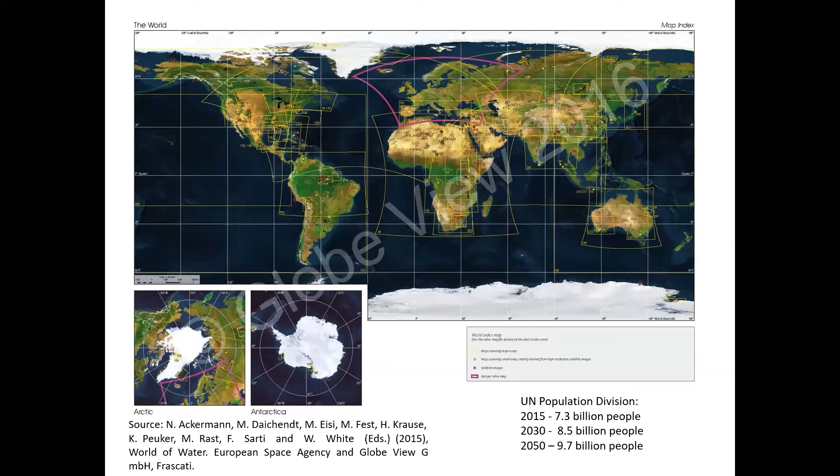I would like to start by all of us seeing the world. It is said that the green in the world depends on the blue. This is, wherever we have precipitation, we will have more vegetation. When we don't have precipitation, the situation is different because the countries and cities that are arid or semi-arid face different types of challenges. So if we see here in our map, the one we all know, we see those parts of the world that have less precipitation. And together with this, with the less precipitation, we know that population continues increasing. So we have the double challenge of providing clean water supply and sanitation services to an increasing number of population with less water resources.

Also in terms of our water resources, many of our cities suffer from water stress, but this is not necessarily because of precipitation, although the impacts of lack or more or less precipitation are important. But this water stress depends on the ratio of total water withdrawal to available renewable water supplies. And this is entirely a human activity. So we need to withdraw more water for our different economic and social activities. In places that are naturally arid or semi-arid, this withdrawal makes water management more difficult. But even then, we are not using the wastewater that represents a very important potential source of water.

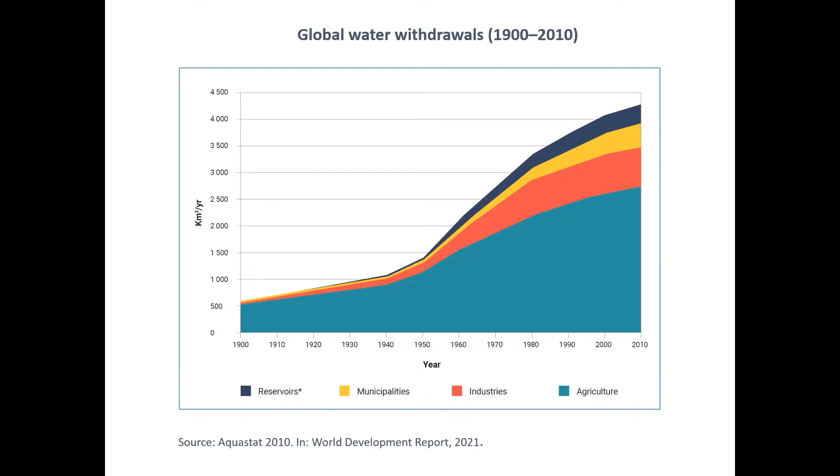Where is it that we have these withdrawals? In which sector? We know that most of the withdrawals are for agriculture, followed by industry, and then the domestic sector. And of course, the amounts we have in reservoirs. And it is said of agriculture that it is a water inefficient sector. However, when we irrigate less, also less water percolates to groundwater. We are a system, and water, clean water and clean wastewater are part of the system in order to provide all these services, the municipal, the industrial, and those in the agricultural sector.

As a result of all the withdrawals, we have that the groundwater table has declined, and this has been known for a long time. It is basically for economic activities. We don't stop withdrawing because groundwater is needed, but we also don't use the water more efficiently. The question is, could we use treated, well-managed wastewater to recharge groundwater tables? And this has been proven numerous times. So it is possible. This is my point in repeating coming every time to wastewater, to clean wastewater, is just to emphasize the importance that the resource has for areas that are depleted, for growing population, and for increasing economic activities.

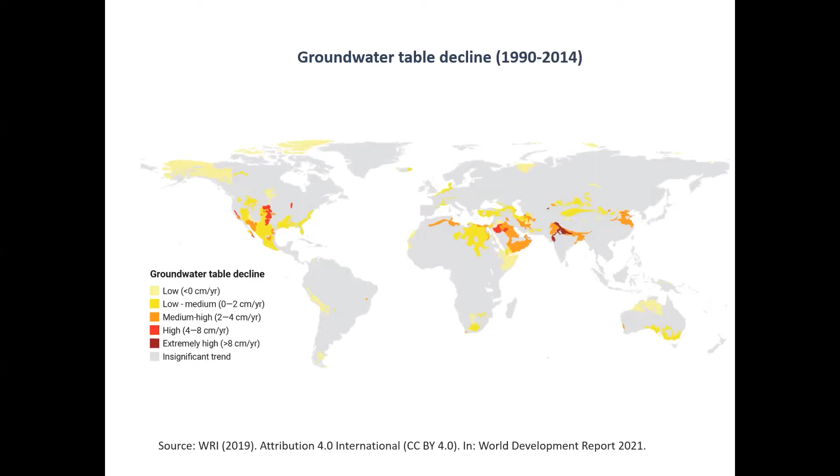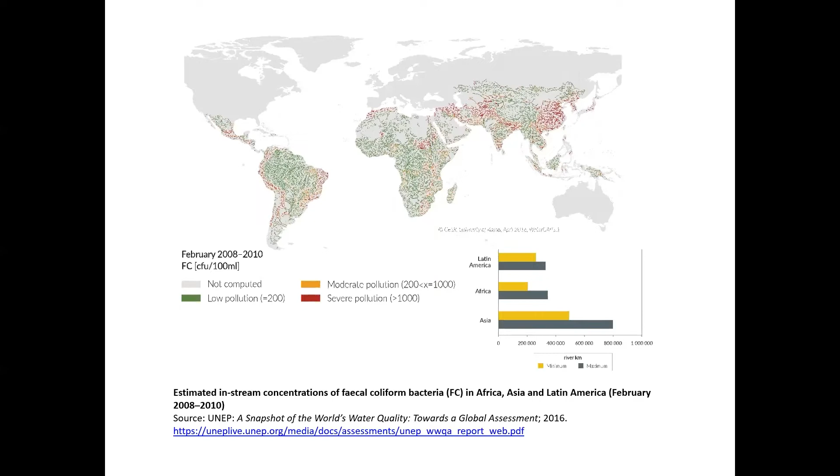Water resources, we know, are scarce and are polluted. In this slide, which is from the United Nations, and it is only for Africa, Asia, and Latin America, we see that our bodies of water are polluted, which we have known for a long time. In the case of developed countries, pollution is mainly because of agriculture, because developed countries have established systems to treat and manage water discharges from industrial sources and domestic discharges. But they have problems in terms of agricultural discharges, and we in the developing world, we have problems because of poor treatment of wastewater, of all economic activities.

They face the same problems, except they have better governance. So we see these graphics until 2017.

By now, 2022, the United Nations says we still have to reach billions of people in terms of clean water, not only water, but clean water. Sanitation is not as good, because many more services need to be provided to larger sectors of the population. So we are running behind in terms of water supply and sanitation.

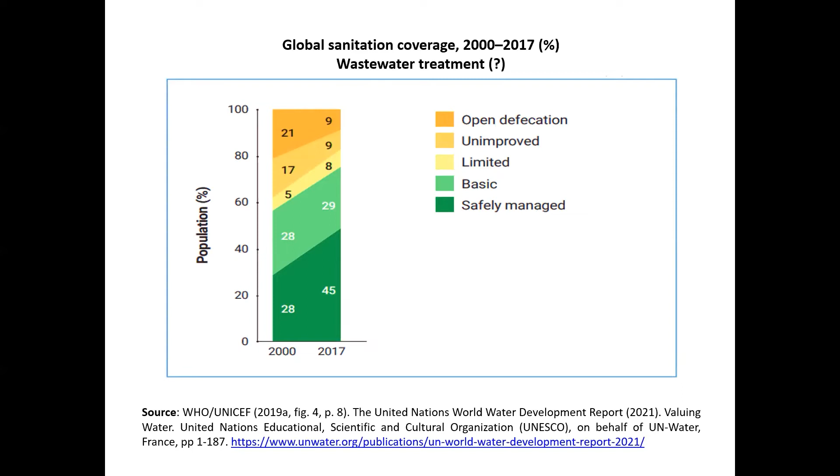Treatment of wastewater has been forgotten for many decades, until the SDGs came. When the Millennium Development Goals came, covering the period from 2000 to 2015, one of the goals was to ensure environmental sustainability, with the objective of providing clean water and sanitation to a certain percentage of the population. Was this achieved?

The United Nations explained the mistake, and it was rectified. The mistake was that improved sources of water were considered, but improved doesn't mean safe water. Improved only means that you compare it with the previous source you had, which mostly depended on infrastructure, which of course is very important. But the fact that we have infrastructure doesn't mean that water is safe to drink.

So what the MDGs were measuring was access to improved drinking sources of water. But again, water quality was not considered.

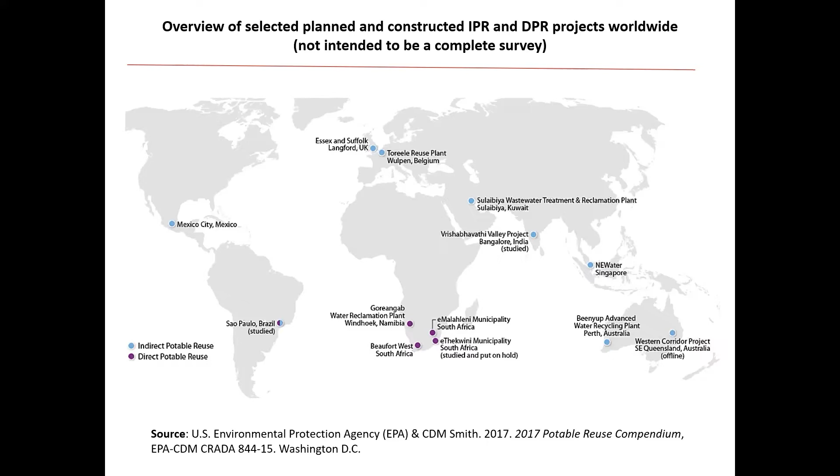And then we have the Western Corridor project in Queensland, which was basically cancelled because people and politicians in the end decided not to work in it. Project capacity goes from, in Belgium, in Wulpen, 1.9 million gallons per day, to now Orange County has 130 million gallons per day, Singapore 122, but it will have more as NEWater plants start operating. This means more water available, more clean water available for more uses.

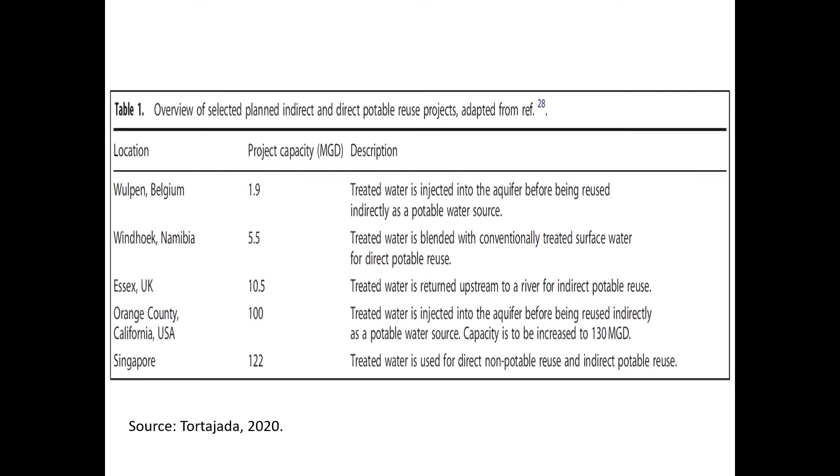This means that wastewater is being managed and treated. So our new source of water is the one that has always existed, which is wastewater.

These are the number of cities. This is from 2017, so you can imagine that by now, 2022, there are more cities already going into either indirect potable reuse or direct potable reuse. But the United States is a place where it's a trend. Water reuse has become a trend.

And what is more important is that, as in the other cases where there are water reuse projects, where wastewater is managed and treated and has an objective, a purpose, this wastewater is not only produced, but it is made part of a water demand management program.

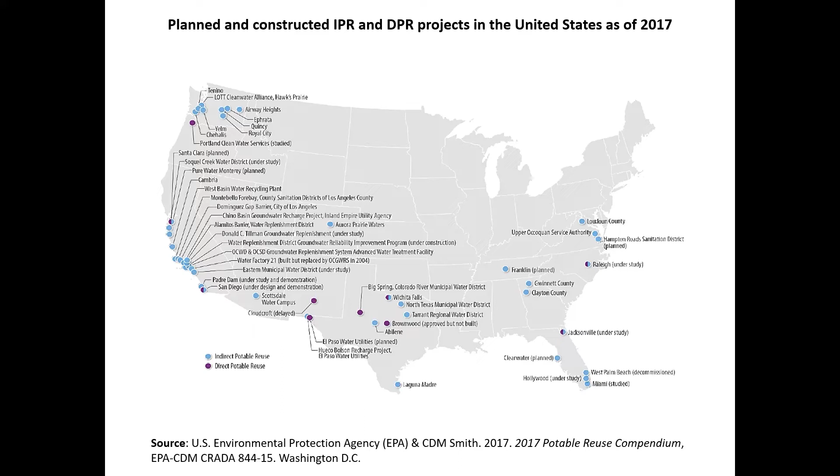So in the case of Singapore, there is more water produced through desalination and treating, managing, recycling wastewater. But this becomes part also of water demand management, not only because there is more clean water, this time from wastewater, but because water conservation plays a very important part in each city where you see recycled wastewater projects.

An example of a city where this potential has been lost for many years is the Mexico City metropolitan area, that has grown in terms of population and now has become the Valley of Mexico metropolitan area.

Our mega cities, we don't count the people. At some point we say, well, they have more than 10 million people, later on more than 20 million people. And we don't know because there is just immigration, all the time there is immigration.

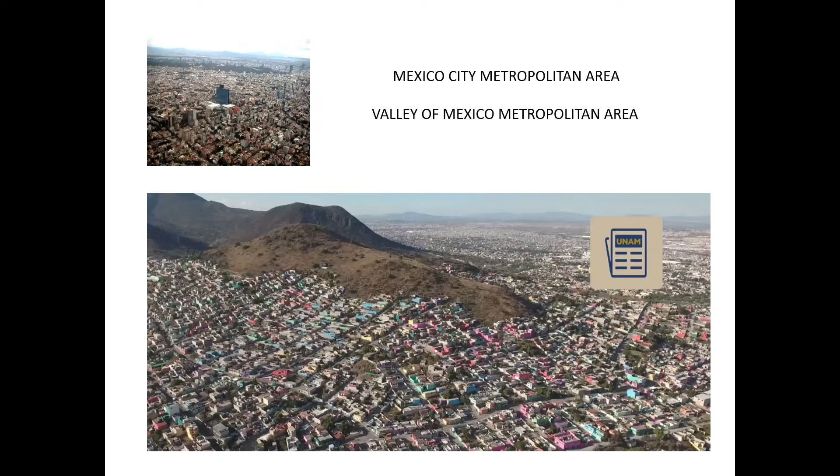So this city is not unique, it looks like many other cities in the world. Population has grown too much, resources are not enough, governance is not the best. What is the situation in terms of water?

This is a city, well, a valley now, that has traditionally obtained water from groundwater, except it has always been abstracted at a higher rate than the natural recharge. For many years, for decades, there has been overexploitation, as a result of which several parts of the city are subsiding.

And the city has always, because it has grown so fast, always required water transfers. What are the impacts of water transfers? The populations who live in those places that are normally rural areas, and the socioeconomic activities you could have in those areas, they have to be stopped. This is what happens in many cities, mega cities of the world. Resources, be this water, food, energy, they are brought to the largest center of population.

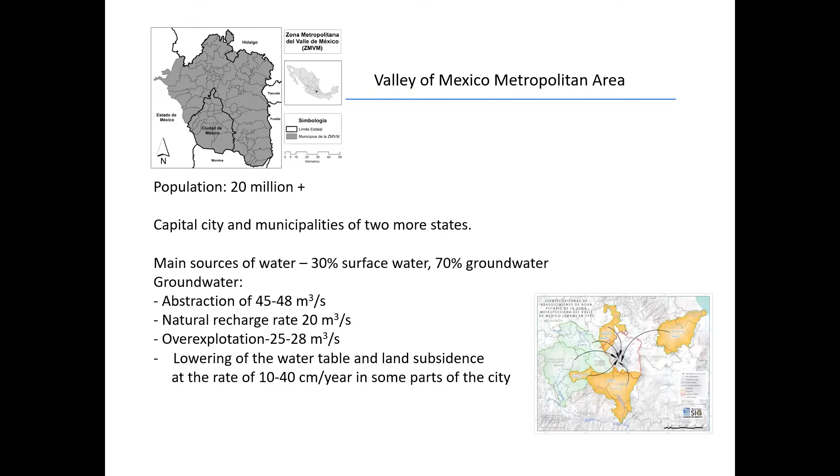So you are producing water, transferring water, and bringing it to a city that is highly inefficient. From where, already some years ago, 45 cubic meters per second of wastewater are produced and are not treated. A very large treatment plant has existed for years, and it is not used to its full potential. So this wastewater that could be used and represent another source of water is not being produced yet. This wastewater that could be part of a water conservation project, that could be part of the system of the city, is not being used.

What are the implications for the population? People who are better off, who live in better socioeconomic areas, have access to better services. This doesn't happen only in this city, this happens in every other city. The people who are wealthier can live in places with better services. People who are poor live in whatever place is available, and they don't always have services.

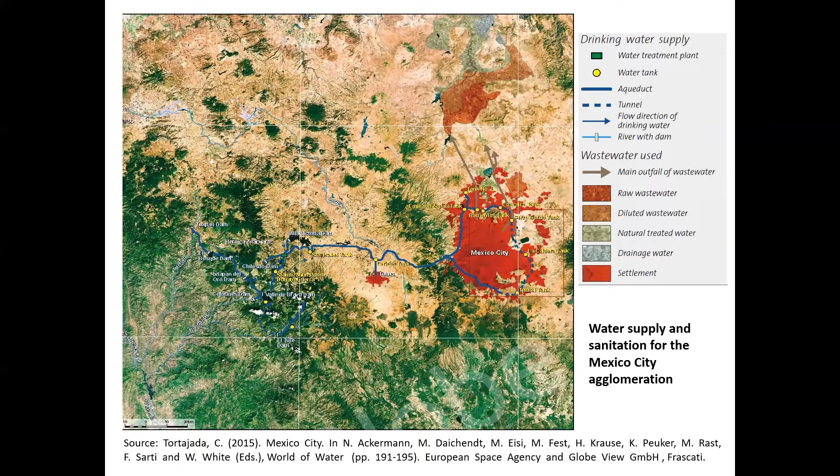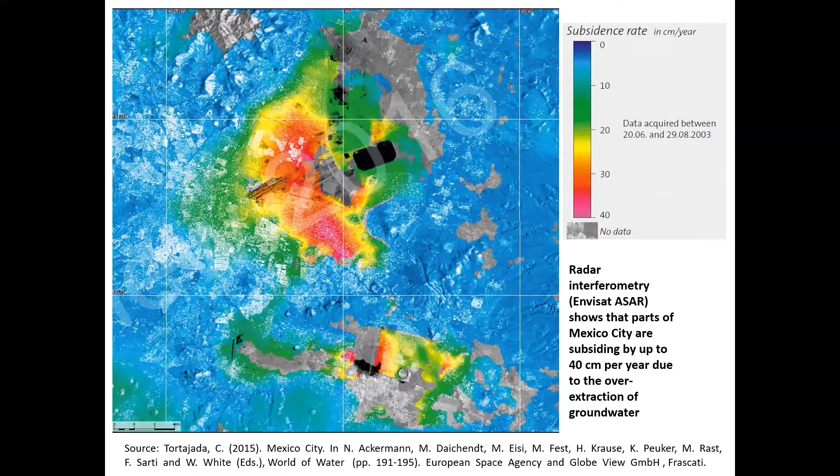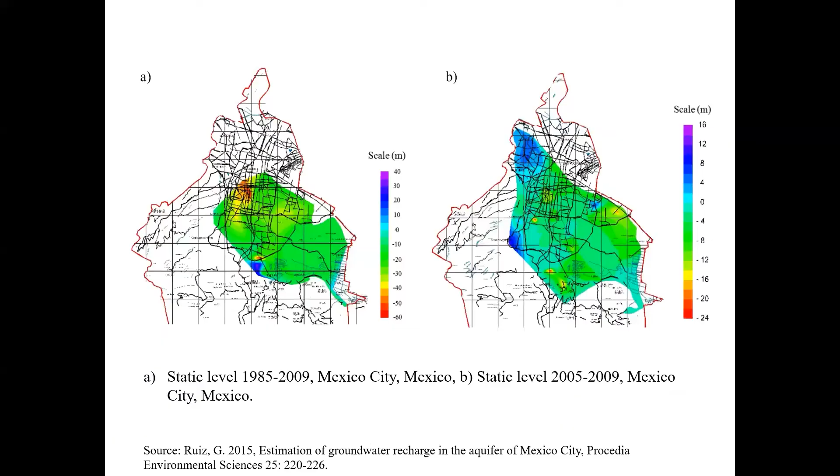We have a problem and we respond to it, and many times with our responses, we create another problem. So what has happened, as I mentioned, in terms of subsidence, many places of the city have subsided by several meters. And we can see in these parts of the city how much we can see the static level.

And this is a diagram I like very much. All the red circles that you can see are surrounding what used to be rivers. It used to be a city of rivers. All of these previously cities of rivers were not treating wastewater, but this means that we already have a way to collect the wastewater. This means that should we as a city decide to treat the water, it is already being collected.

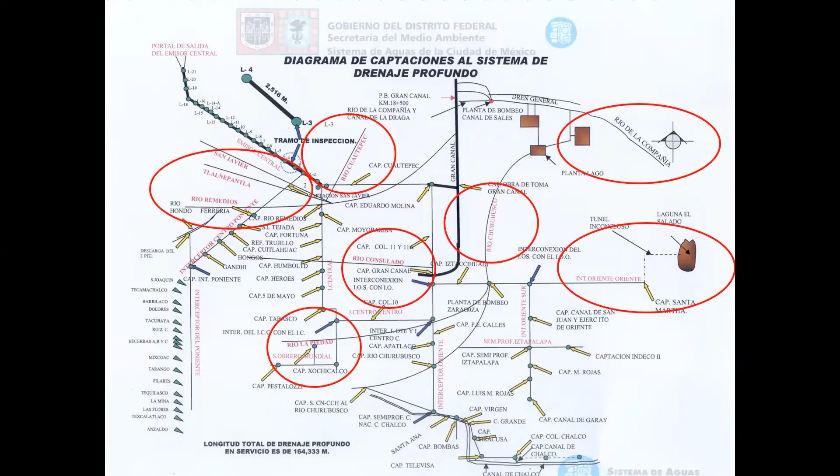We know that Singapore has been working very hard on the deep tunnel phase 1 and phase 2, whose purpose is to collect the wastewater. Well, here in the city, the previous rivers are collected through drains. So they could be - you already have a system that would have to be improved, but there is already a system. Now, the next step would be the treatment and the better use.

Where does the wastewater go? Mexico and India, several parts of the countries, have been known traditionally for years for using raw wastewater for irrigation. And it's a sense of pride that is not properly understood. We shouldn't be using it, because with this, we create problems in the environment and related to human health. However, these are the sources of water that are available. And this is a very political issue, because the farmers want the water because it's free, with heavy metals and all the contaminants we have.

But a solution is possible. Now very quickly, I will show two examples, one of potable reuse, which is Windhoek. This is a developing country. From 1968, Windhoek, which is in a desert area that suffers extended periods of drought and depends on groundwater, and where surface dams depend on ephemeral rivers, depends on treated, recycled wastewater for domestic uses in the capital city, which is Windhoek.

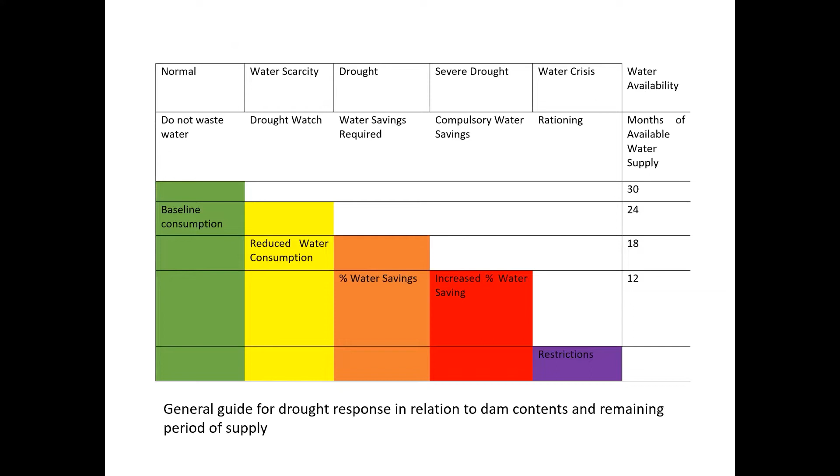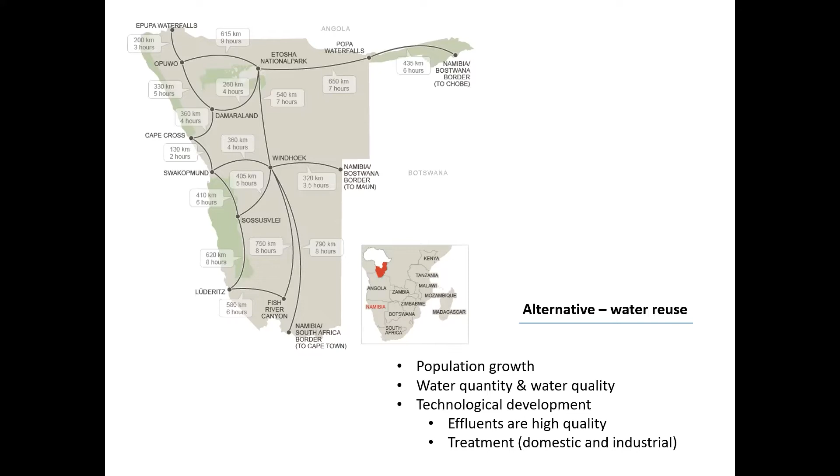The alternative, as I have mentioned, is water reuse. It's never about water, it's never about the technology alone, it's about the planning. It's about considering your water quantity, your water quality, the uses of your water, and how you manage the demand. And then finally I come to Singapore, where we know there have been innovations in terms of policy, management, and also technology.

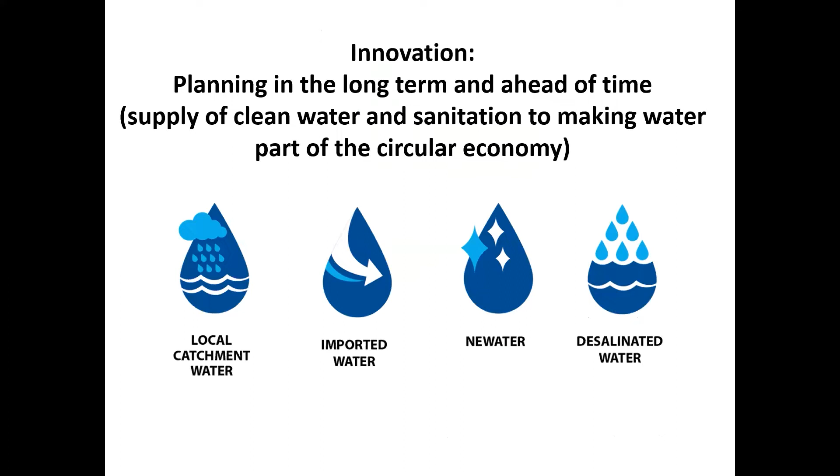We know of the four water taps, but I will focus only on the third one, which is NEWater, or recycled wastewater. What we have is several numbers, but what we really have is a plan. It's not about the number of NEWater plants, it's a plan: I want to grow, and one of the resources that are reliable and that I have is wastewater.

So I manage it properly, I treat it properly, and then I use it mainly for industrial purposes, but also for domestic purposes if necessary. Our wastewater becomes one more source of water within a plan. If we don't use it within a plan of water conservation, water demand management, development and growth, then it will also be wasted, as water is normally wasted by all sectors.

Challenges we know all over the world include public perception, in addition to costs. Not only the Public Utilities Board, National Water Agency of Singapore, but every other city that is treating and managing wastewater and using it, needs to approach and deliver a message to the media, members of parliament, religious leaders. You provide public education campaigns, show the value of it, which is what Singapore has done, and you always keep a positive tone, because having more resources which are clean is always positive.

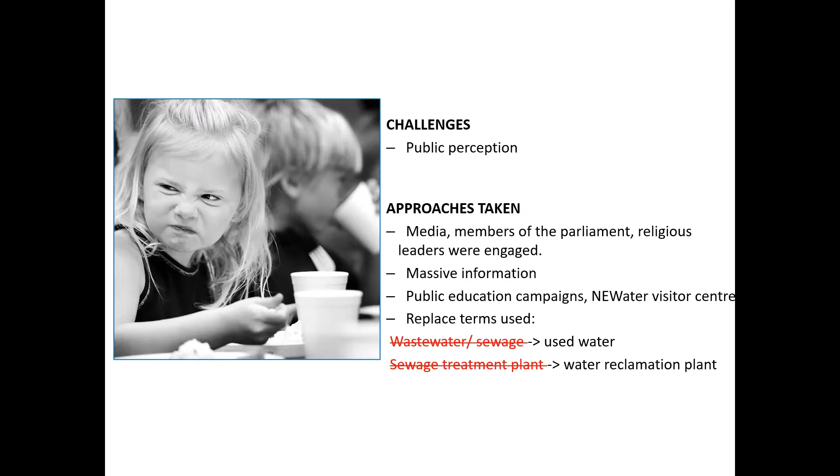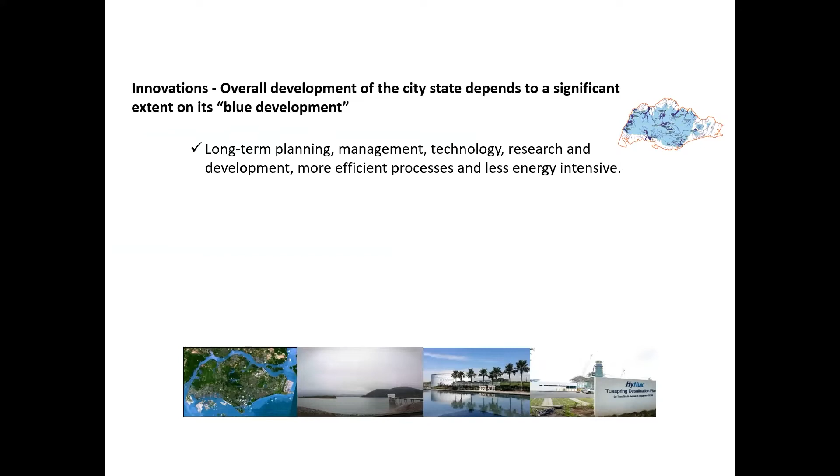When we talk about innovations, we tend to focus on technology, but they are not the most important. The policy innovations are the most important ones. We need long-term planning, management, technology, and research and development. Because if we don't do it within these overall plans, and if we focus only on one resource, it will not result in all the benefits it can if we do it within a broader plan of development.

We are diversifying water supply sources, but we should also work more in terms of protection and reliability. We have wastewater, and we will continue having wastewater. It is a reliable source - not only in Singapore, as with new water, but in every city of the world we have new water. We have wastewater that can be treated and used at different levels.

Finally, we're looking for systems that are more robust during events such as droughts, and this is something climate change has been teaching us. There are problems, we have to address them from now, and we should try to buy time. But wastewater provides services. Wastewater, again, just summarizing, sustains water resources. It helps us to deliver services, and it helps us to build resilience.

Clean water is not, and will never be, possible to provide for all users if wastewater is not collected, treated, and disposed of properly for the intended uses. It is a cycle, and we have to learn to consider wastewater as part of our clean water sources for our SDGs at the macro level, and to cover every other need at the micro level.

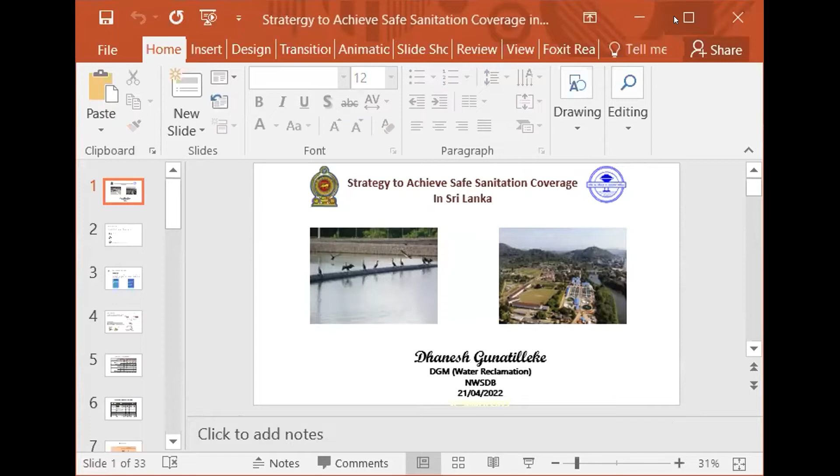Hello, Engineer Dhanesh? Yes, yes. Okay, we cannot hear you. Can you hear me now? Now, yes, now it is okay. Yes, okay, please go ahead. Yeah, okay, I'll continue.

So I'll be discussing strategies to achieve safe sanitation coverage in Sri Lanka. I'll be orienting my presentation in basically three areas: the recent development of the sanitation master plan by the National Water Supply and Drainage Board Sri Lanka, where we are right now, and the technological approach to meet sanitation targets. So that was my presentation outline.

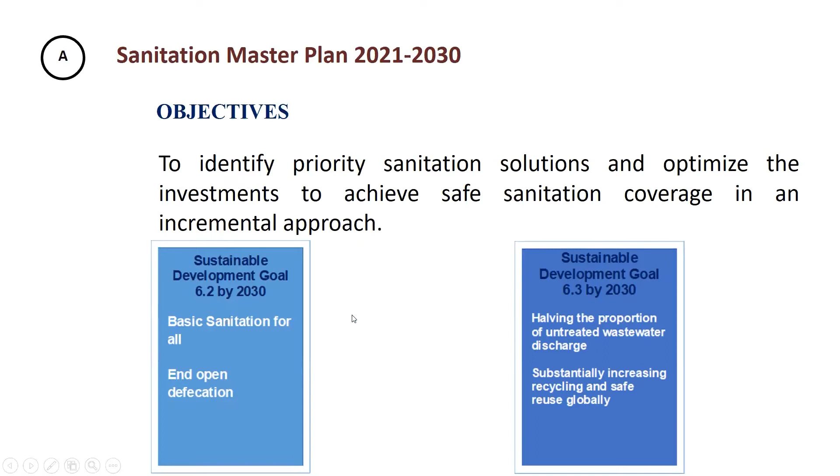As you all know, the Sustainable Development Goals 6.2 and 6.3 require certain commitments by 2030. So we developed our sanitation master plan based on achieving those targets. Basic sanitation, as it implies in Sri Lanka, mainly refers to on-site sanitation systems, such as septic tanks and associated effluent disposal systems, such as soakage pits and soakage trenches, or further treatment options. But in order to become safe sanitation, these on-site sanitation systems, such as septic tanks, need to be desludged once a year, or once in 5 years, depending on the design.

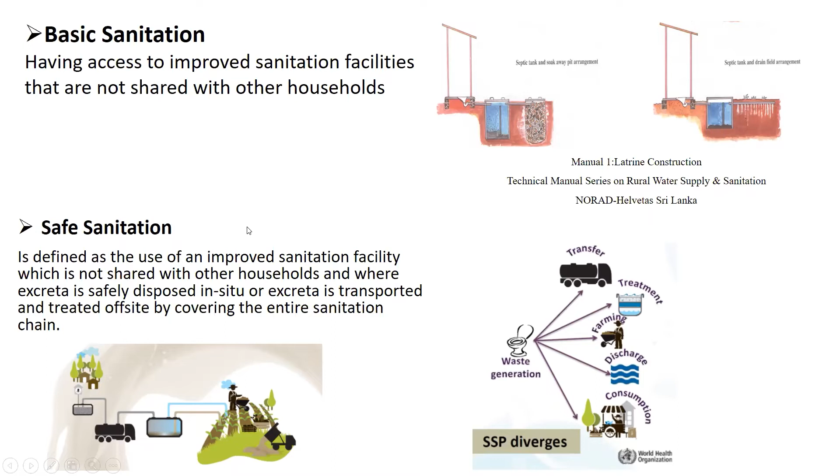And therefore, this sludge has to be safely disposed of or further treated to close up the entire sanitation chain. So therefore, to achieve safe sanitation, we need to consider the septage management or the residual management of the septic tanks as well.

So based on our sanitation master plan, we have identified the investment requirements for on-site sanitation improvements, fecal sludge management, decentralized wastewater treatment systems, and centralized sewerage treatment, and blending the solutions. Because Sri Lanka's topography changes from mean sea level to beyond 2000 meters above MSL, and with the financing limitations of the country, it's very difficult for us to go for fully covered public sewer systems. So therefore, in order to have the safe sanitation coverage which is most required, we have to have a blend of solutions.

So the institutional-wise budget requirement has been identified under the master plan, in rupees million. For example, NWSDB needs to achieve the targets by having 489 billion. Likewise, local authorities, the health sector, Board of Investment, Industrial Development Board, and National Housing Development Authority have been identified to meet the safe sanitation targets. The financing options are from the government side; we have identified several options for donor financing, direct contracting, and public-private partnerships, and so on.

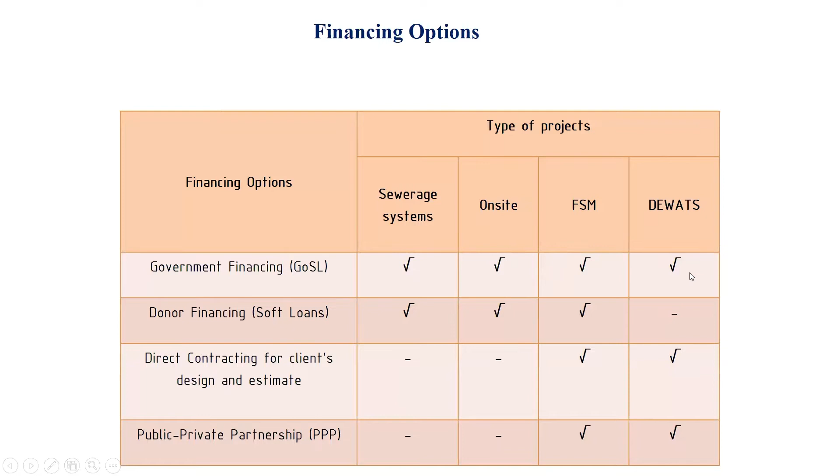So the technical approach to meet the sanitation target, for the development of the master plan, we have used what NWSDB has been practicing in the recent past as the strategy to achieve the safe sanitation coverage.

So we have on-site systems. On-site systems can reach up to 100% basic sanitation by year 2030. And since on-site sanitation requires desludging the septic tanks, we need fecal sludge management to cover and achieve a safe sanitation coverage of around 53% by year 2030.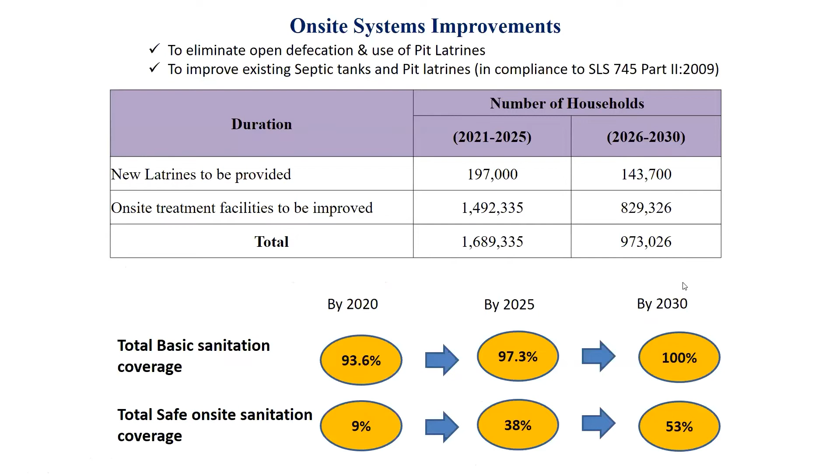And total safe sanitation coverage increased from 9% to 53% by constructing several septage treatment facilities for the districts. Those that do not have any existing wastewater treatment plants can accommodate about 2 to 3% of the operating capacity of such plants for the septage, that is the septic tank sludge taken by the vacuum trucks, or the gully bowsers as we call them.

So the septic tank systems we are also considering with further treatment options, especially in cases when the seasonal high groundwater table is high. In Sri Lanka, we have the coastal belt around the country, with higher water tables. So therefore we have an issue, because if we have the septic tank, it removes only 55% of the BOD, the biochemical oxygen demand of the wastewater. So there will still be about 110 milligrams per liter of organic contaminants that has to be removed before it reaches the groundwater table.

As per the Sri Lanka Code of Practice, SLS 745, Part 1, 2004 and Part 2, 2009, we have to go for further treatment options in cases where the seasonal high groundwater table is high, because soakage pits or trenches don't work. So we had to go for further treatment options like upflow anaerobic filters combined like this one. And we are in the process of standardizing concrete septic tanks in collaboration with the Sri Lanka Standards Institute to develop an SLS standard for concrete septic tanks.

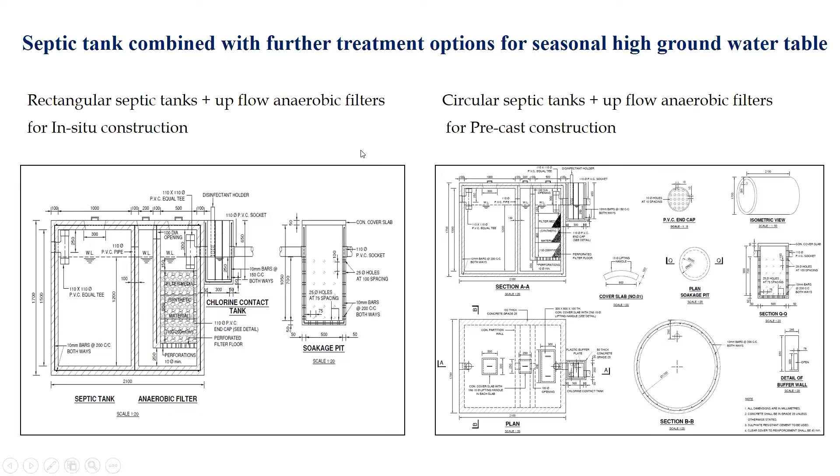For fecal sludge management, we started septage treatment, or these septic tank sludge treatment facilities, in December 2004. We had the tsunami outbreak, and afterwards we had camps for the people who lost their homes. Then we developed anaerobic ponds followed by facultative ponds and maturation ponds, the waste stabilization pond systems, to treat wastewater emanating from these camps.

That really paved the way for us to develop the septage treatment plants, and we conventionally went through with these pond systems, having anaerobic ponds followed by facultative ponds and maturation ponds. We changed our approach very recently, since these natural treatment systems such as waste stabilization ponds require a lot of land. So when we can't find adequate land, we had to go for mechanized systems.

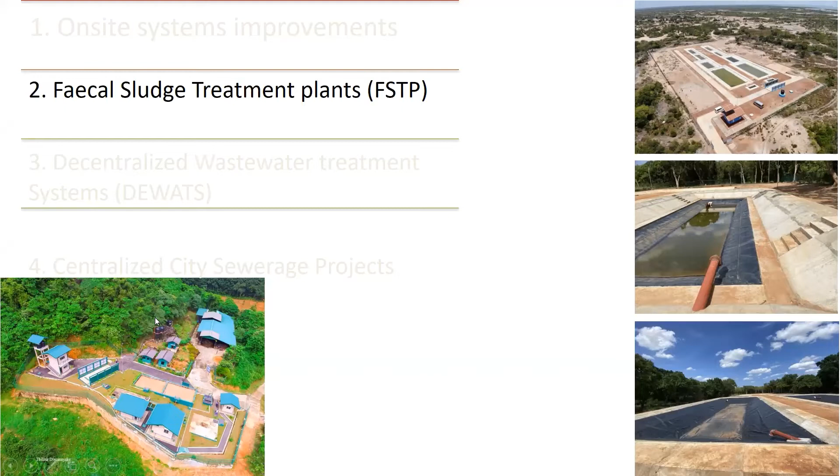So our new development for septage treatment, when we can't find adequate land, is to go for an anaerobic pond followed by activated sludge extended aeration, then disinfection, and discharge in compliance with regulations to inland surface standards, or further refinement if needed depending on the sensitivity of the discharge location. So you can see the fecal sludge treatment plants.

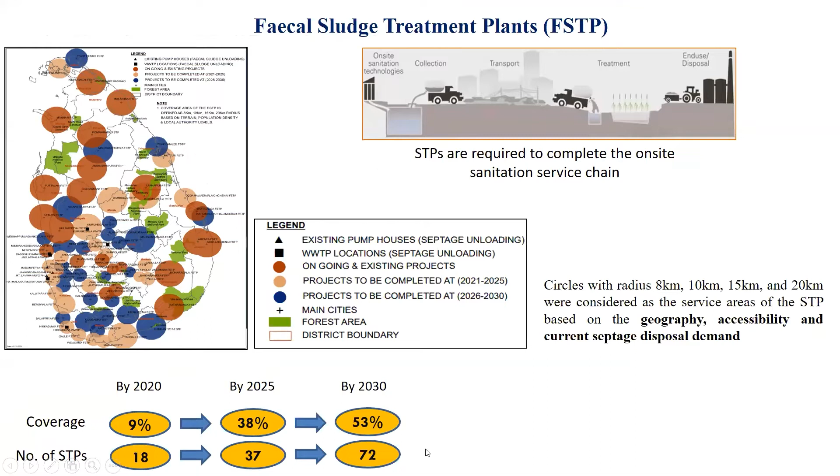We are planning to achieve safe sanitation coverage by increasing it from 9% to 53%, with a number of septage treatment plants to treat the material taken from vacuum trucks or the gully bowsers, increasing island-wide to 72 plants by year 2030.

And septage treatment plants, how we are approaching, you can see from this table by 2030 how many septage treatment plants we are planning. It's around 72 at least septage treatment plants around the country.

You have only 2 minutes left, Danesh.

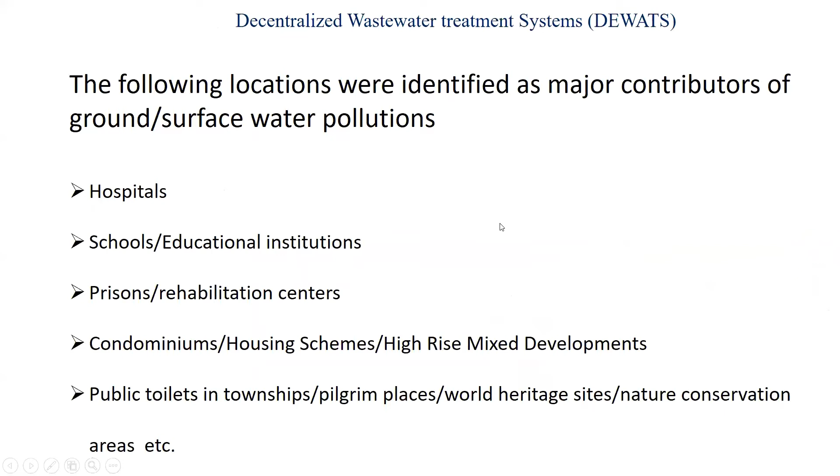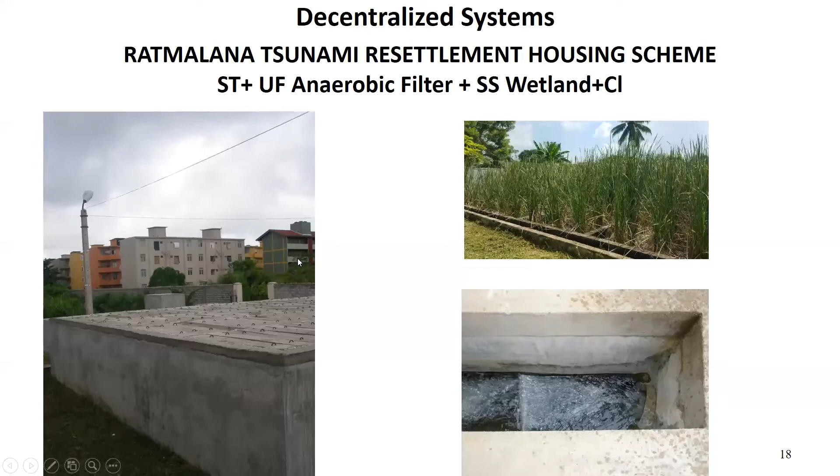Okay. Then the decentralized wastewater treatments, you can see here: hospitals, schools, prisons, condominiums, public, and some examples of what we have implemented in the decentralized systems like Ratmalana Tsunami Housing Scheme, and Adams Peak, which is a World Heritage Site, and then different various wetland applications for various applications you can see.

In the NWSDB strategy for centralized wastewater treatment, we go for the first choice as waste stabilization ponds because it is natural treatment and nutrients are not removed, so therefore it's good for reuse in agriculture, and helminth eggs and other pathogens are removed naturally.

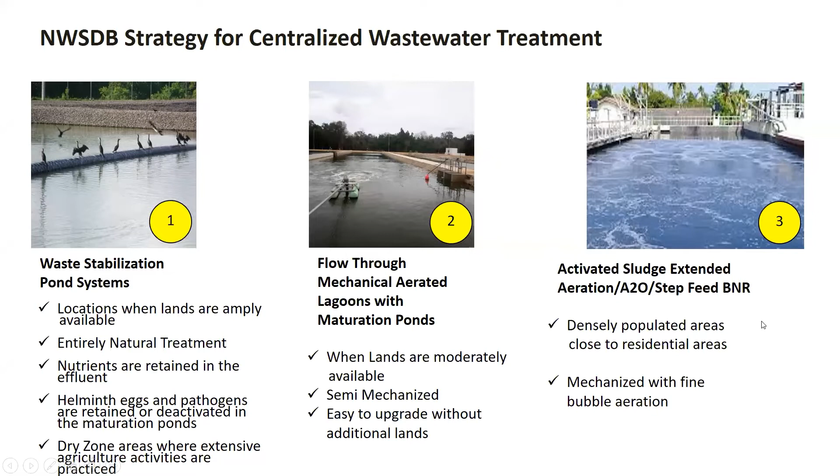The second option is to go for mechanized systems combined with maturation ponds, mechanical aerated lagoons, when lands are moderately available. When we don't have much land, especially where our plants are located in densely populated areas surrounded by residential houses, we go for activated sludge extended aeration with A2O and step feed biological nutrient removal, depending on the sensitivity of the discharge location.

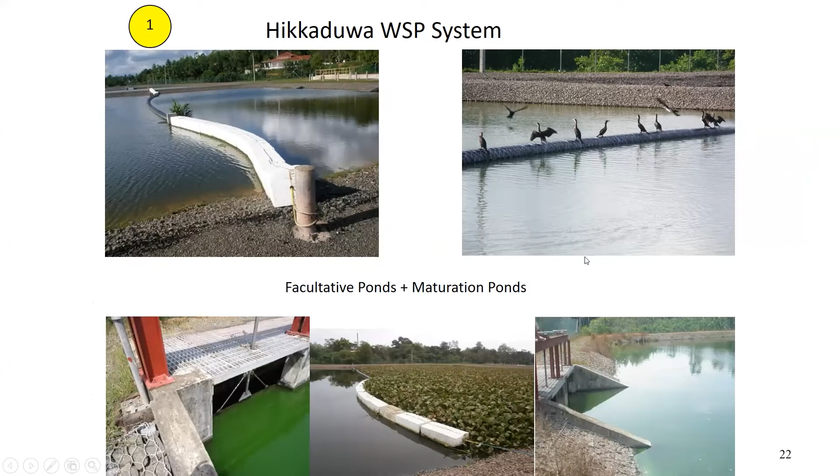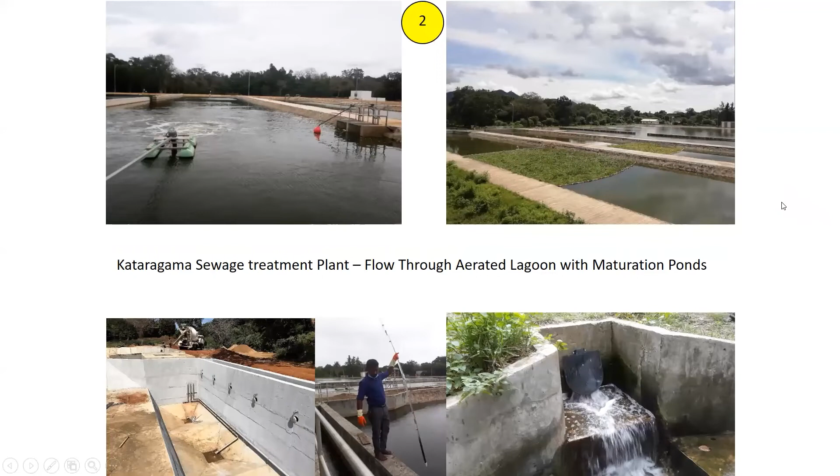For the first option, you can see Hikkaduwa, which has been an entirely natural treatment. The second one, semi-mechanized treatment, you can see the Kataragama City upgraded treatment plant. And the mechanized one, you can see from Soysapura and Kandy City Wastewater Disposal Project.

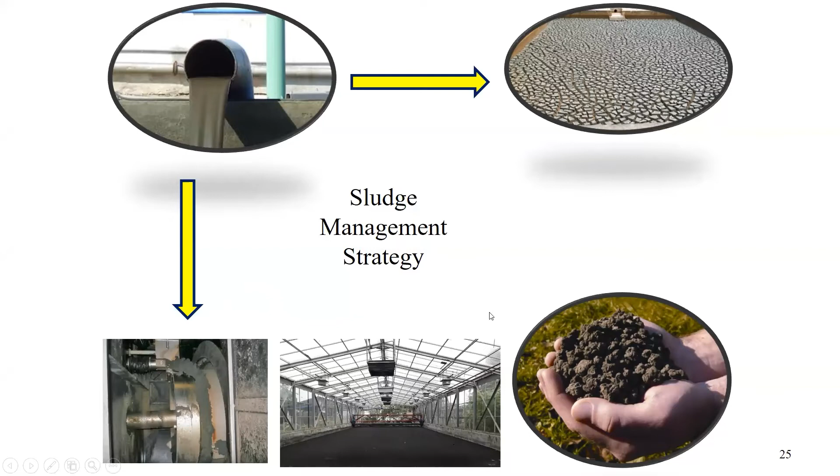Our strategy for sludge management: when we have dry zone areas, we go for natural sand drying, when we have adequate land. But when we have constraints, we go for mechanized treatment with thickening, mechanical thickening or gravity thickening, followed by mechanical dewatering, along with solar sludge drying beds, so that we can granularize the sludge, and that can be used for co-composting purposes.

For effluent disposal, our strategy is to reuse as much as possible. The first major wastewater reuse project is proposed for Jaffna. We have got the environmental impact assessment clearances, and the AFD board has approved funding, but we are still waiting for implementation due to financial constraints.

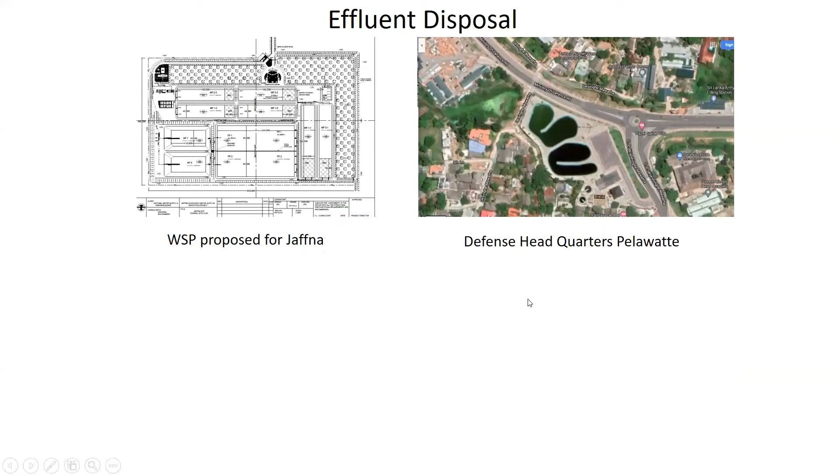And defense headquarters, again activated sludge with maturation ponds, being in Colombo, we have developed. And this is again for Jaffna, where we are pumping about 4.5 kilometers upstream for reuse, and we can discharge directly, as we are meeting the inland surface discharge standards. When there is no requirement for crop water, we can go for direct discharge.

And this is again Hambantota. We did not consider sea outfalls for Hambantota because most of the salt production in the southern coast is in Hambantota. Therefore, we went for reuse, and we have got the environmental clearance for that.

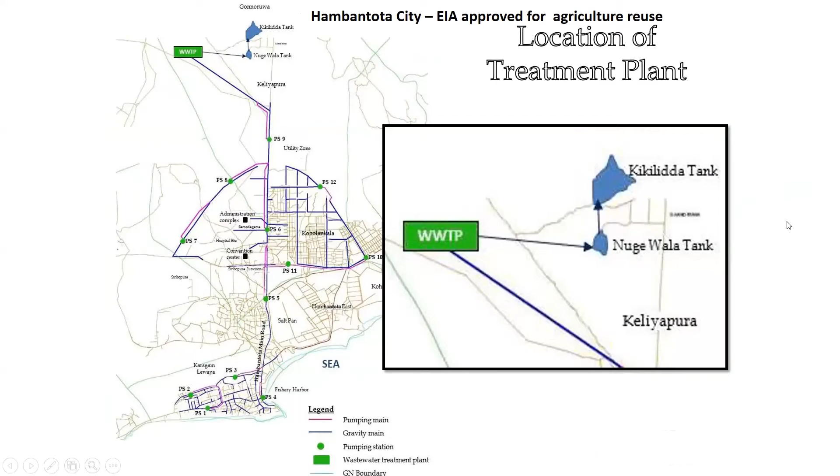Our strategy for disinfection will be to go for natural treatment with maturation ponds if lands are available. If we go for ultraviolet radiation, that's in cases where we have major drinking water intakes downstream. If there are no downstream intakes, we go for chlorination by sodium hypochlorite dosing system.

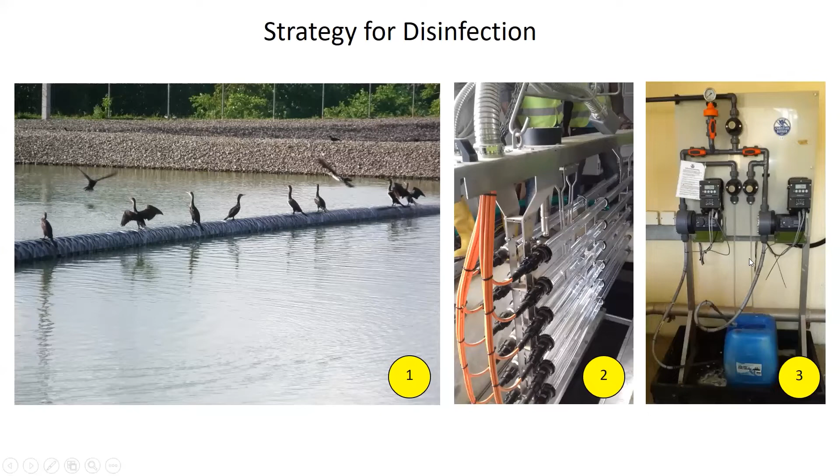So you can see the different interventions we have done. And finally, to conclude my presentation, what we really try to do is blend solutions specific to Sri Lanka to meet the safe sanitation targets, to protect our environment for future generations.

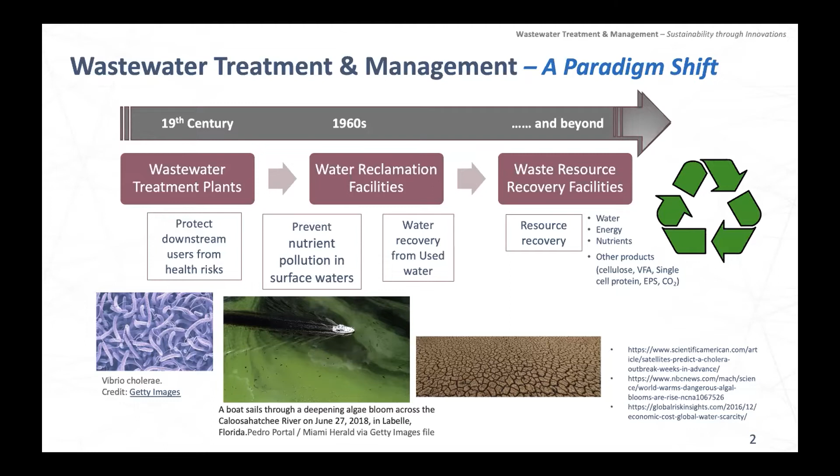This is certainly a shift in how we look at wastewater - instead of a waste, it's becoming used water for resource and recovery.

Now moving forward, food is becoming very challenging worldwide, especially with recent events in Europe - food shortage is increasingly going to be a big challenge for the world. This concept of food security is already becoming a hot topic in the last couple of years.

In many areas of the world, especially urban cities, people talk about urban farming. For Singapore, we have the target of 30 by 30, which is to achieve 30% food production by 2030. So how can an urban city like Singapore achieve such a target with such limited land footprint? The approach is to have urban farming.

And of course, we know urban farming has its pros and cons. When I say urban farming, typically it means rooftop farming - planting your vegetables on the roof. The other approach is to have indoor farming.

With indoor farming, you will be very resilient from climate change issues like flooding or drought, because it's a well-controlled environment. But nevertheless, the cost is going to be high.

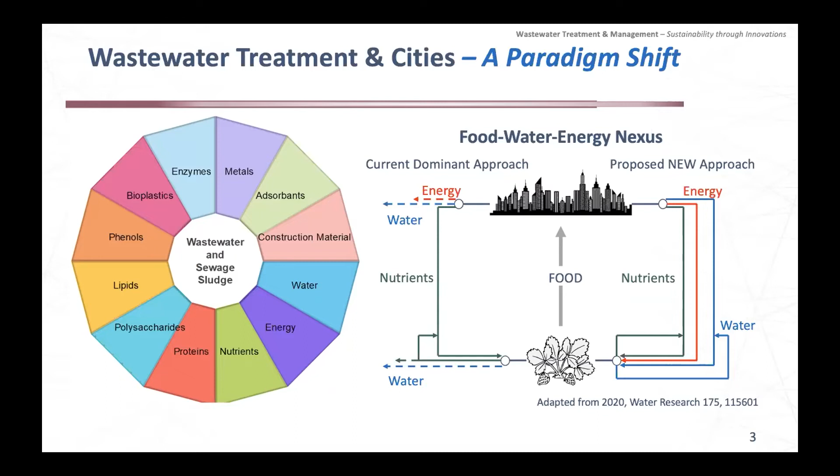Now, coming back to water as a resource itself, this is a classical Singapore approach which has been in practice since at least about 20 years ago, and since 2000, basically closing the water loop by taking the wastewater and treating it to high quality water.

We call it NEWater, which is then pumped to natural reservoirs before it's treated again for drinking water, or the NEWater is sent to industry for direct non-potable use.

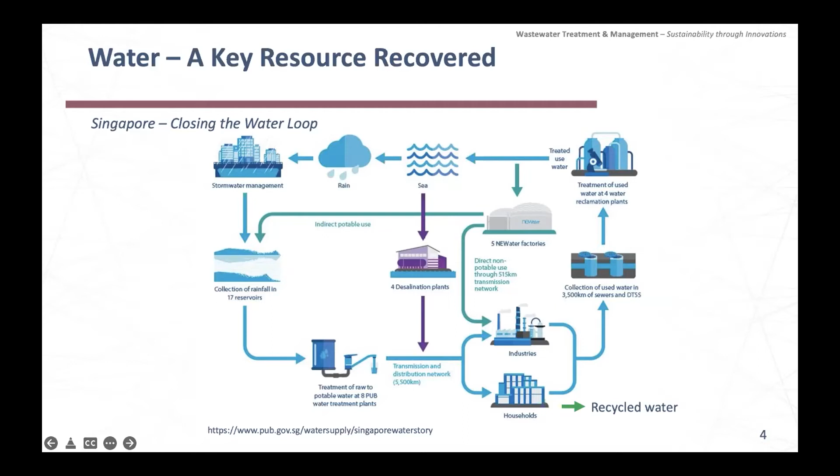So another approach, of course, we know is seawater desalination. With this, we can achieve resilience in terms of water sustainability and water supply. So nowadays, if Singapore has a short period of dry weather, we do not face any water shortage issue. So that has been done all the while, and it is a very sustainable approach.

However, the other challenge for Singapore is that by 2060, the Public Utility Board of Singapore projected that we need to double the water supply from current about 430 mgd to meet future demand. The current demand is about 45% for domestic water use, 55% for non-domestic industry use. By 2060, the proportion will shift such that industrial water use will increase to 70% of non-domestic sector use. So certainly water supply needs to be increased.

Nevertheless, the target is that Singapore wants to achieve this increase while maintaining the same amount of sludge production, at the same time minimizing the increase in energy consumption. Meaning, meet this water demand in 2060 at current energy and sludge footprint. So this is a very, very aggressive target goal, especially nowadays when people talk about decarbonization and the impact of CO2 on climate change.

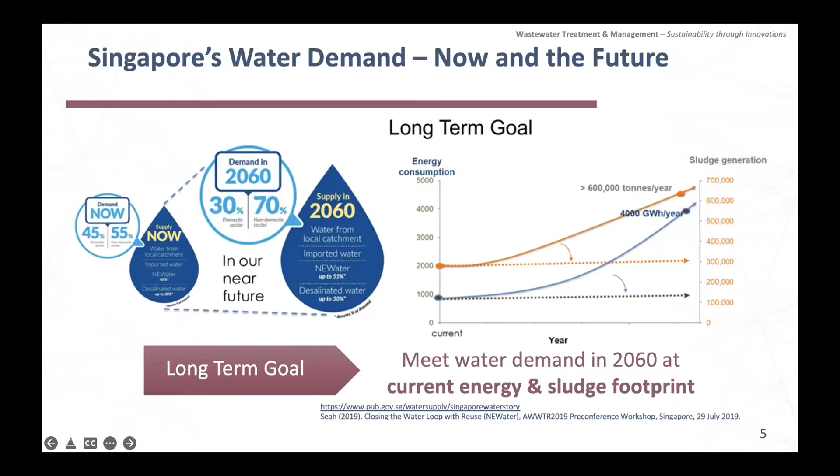So energy efficiency is a very huge topic, especially for our water industry. And the sludge issue is that Singapore has limited land mass for landfill capacity to handle this additional sludge.

So if we look at water reuse, certainly most of us think about membrane processes. In Singapore, membrane bioreactors have been used to replace the conventional activated sludge process because of the smaller footprint and higher treatment capacity. At the same time, you produce a final effluent of high quality that can go directly into a reverse osmosis process.

Another thing people are looking into is how we can recover more water from the RO rejects, so researchers are looking at technology that can enhance further water recovery. At the same time, researchers and membrane suppliers, including PUB itself, are trying to optimize the process to reduce energy consumption. Early on, PUB reported that by optimizing the process, power consumption for the membrane reactor can be less than 0.5 kilowatt hour per cubic meter of water. So this is an approach to achieve energy efficiency while reducing sludge production.

Now, as for membrane technology, we also look at advances we can adopt in the membrane itself. For example, more and more plants are being expanded or retrofitted using ceramic membranes. We have worked with some ceramic membrane companies to demonstrate that such plants can achieve long-term operation with good treatment performance in terms of product water quality, as well as durability and stability of the ceramic membranes.

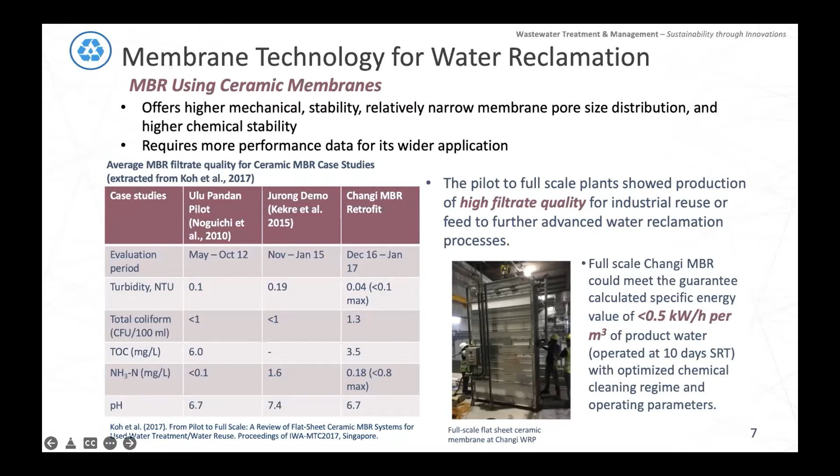Earlier I talked about new water RO reject recovery. Even after membrane bioreactor or traditional activated sludge followed by MF/UF filtration, this product water is then subjected to a reverse osmosis treatment process to produce high quality product water, which in Singapore we call new water. We know reverse osmosis can't run at 100% recovery because you'll get scaling and severe fouling in the membrane. So typically for new water production, the recovery is maintained at 75%, meaning 25% of the inlet water ends up as RO brine, typically sent for discharge through the outfall.

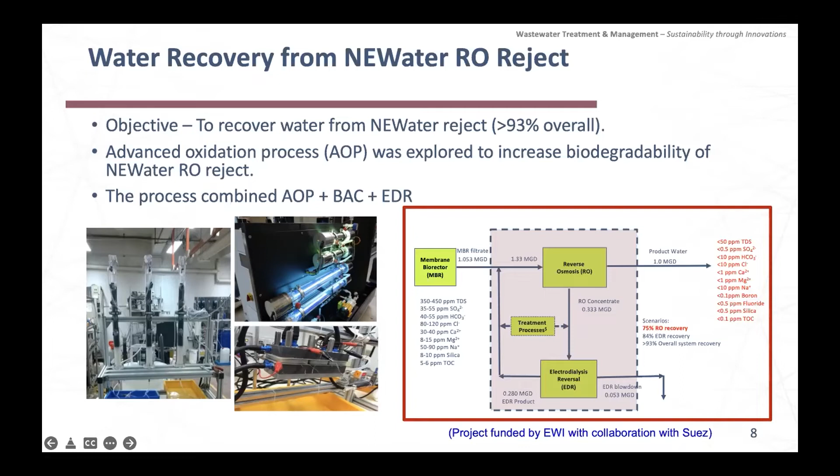But we have to keep in mind that this inlet water to the reverse osmosis already has treatment cost built into it. So can we recover more water by reducing the RO brine? That's where we explore using other technologies such as electrodialysis reversal to recover more water, and after that, achieve more than 93% overall water recovery. That project has been done successfully with SUEZ, demonstrating that we can achieve this target at a reasonable cost for the additional advanced treatment.

Now, of course, carbon emission is another major issue, a hot topic for our industry especially, and also other energy sectors.

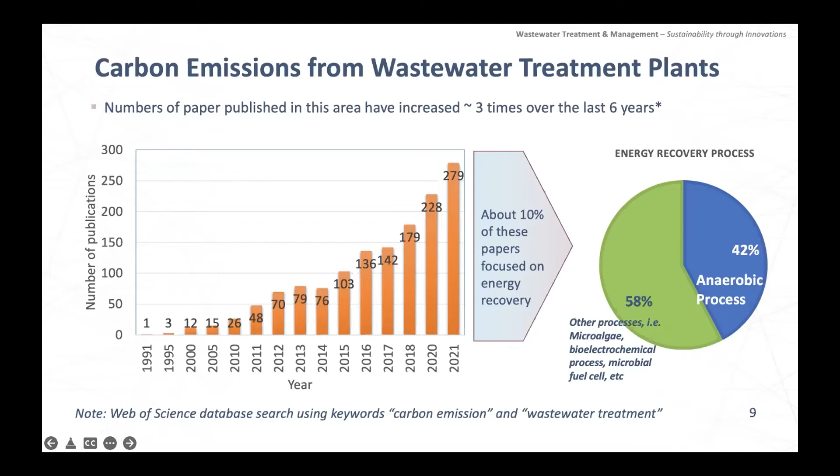If we look at the number of paper publications or research being conducted related to carbon emission, the number has increased exponentially. CO2 emission for wastewater is one of the topics people are looking into. Instead of the traditional activated sludge process where we convert to CO2, are there other processes we can adopt to achieve energy recovery? Out of all this research, energy recovery, especially anaerobic processes, comprises 42% of the studies, and then microalgae, bioelectrochemical process, microbial fuel cell take up the other 58%. So people are looking at how we can achieve energy recovery.

Now if we look at the consumption of energy throughout the plant, the most intensive use of energy is basically the activated sludge process, where aeration easily takes up a substantial amount of the energy, and electricity alone contributes 25-40% of the total operating cost. So the approach people have taken is can we move away from traditional aeration and go towards anaerobic process?

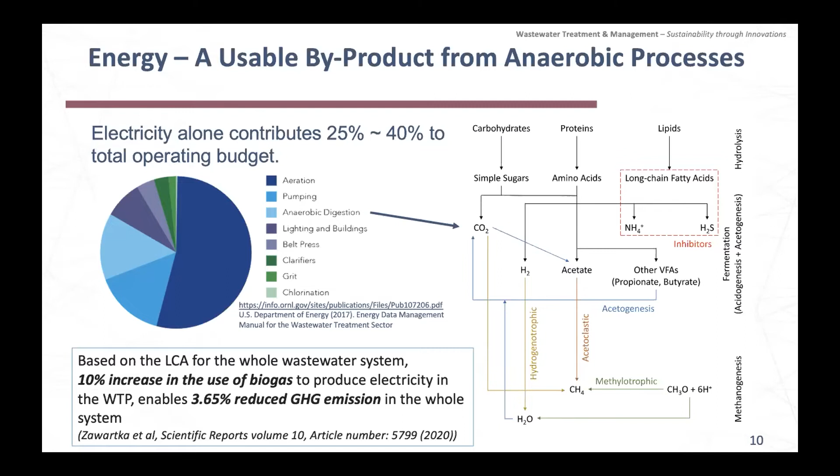Even for mainstream anaerobic process, there's a potential for resource recovery while producing methane, which we use for energy production. At the same time, other people are exploring byproducts of the whole process. Based on a life cycle study of the whole wastewater treatment system, a 10% increase in the use of biogas to produce electricity in wastewater treatment will enable a 3.65% reduction in greenhouse gas emission in the whole plant. So we know that by doing biogas recovery, we can substantially reduce emissions because we extract the energy back before we release it as CO2 through electricity production.

So with that process, people are looking at anaerobic treatment as a core treatment process. Of course, anaerobic treatment is not the magic solution to all treatment processes. At the end of the day, under anaerobic treatment, you produce an effluent that is low in organics but still very rich in nitrogen and phosphorus. This water, after anaerobic process, can't just be discharged to the environment because this discharge is likely to contribute to eutrophication and environmental issues.

Nevertheless, after this anaerobic process, this wastewater is a great permeate for agriculture, for irrigation, and these things. If we combine anaerobic process with the membrane separation process, we get biogas production which can be used for power generation or converted to other bio-natural gas like hydrogen - that's possible from the methane, and that is the biogas. For the permeate, there's a high amount of dissolved methane which can be further recovered. This permeate will be high in nutrients, nitrogen and phosphorus, as I mentioned earlier.

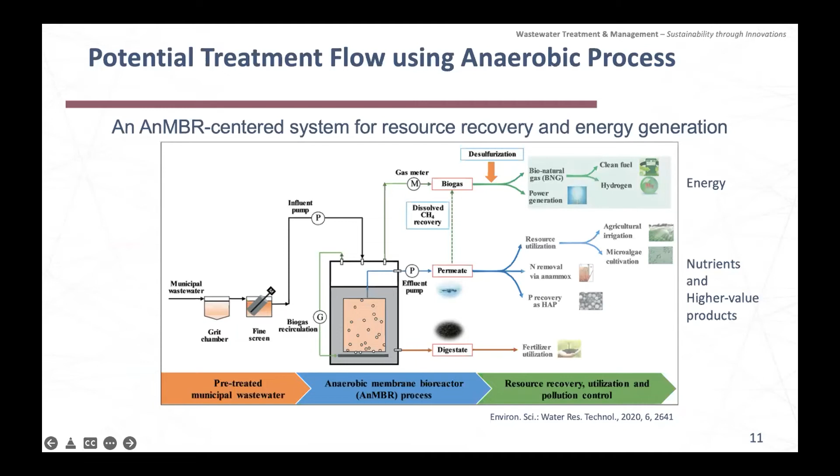Then how can we use that? People talk about direct agriculture irrigation, or we can use microalgae cultivation to grow algae which can be harvested for other usage. We can also potentially look at phosphorus recovery as a high value product. Then the digestate can be used for fertilizer utilization, especially if the feed water does not contain any heavy metal. So these are possible approaches that people are exploring - looking at energy, nutrient, and high value product recovery.

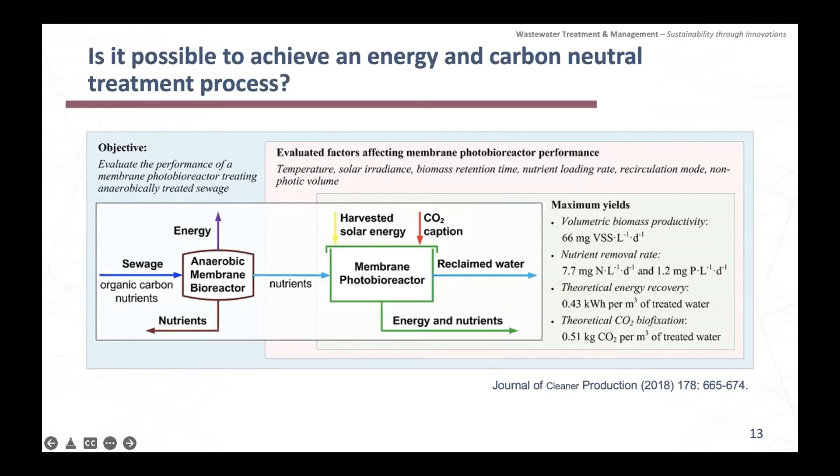So the question is: is it possible to achieve energy and carbon neutral treatment processes? This is one potential treatment scheme where anaerobic MBR recovers energy and nutrients, goes to a membrane photobioreactor for further processing, and then you reclaim the water and recover nutrients and algae. So there's a potential way forward.

Now, the other issue we always have is especially membrane fouling. So we have studies looking at the traditional way, through biogas sparging, especially for anaerobic MBR. It's very similar to aerobic MBR, except instead of air aeration, you use biogas sparging. This has been commonly used.

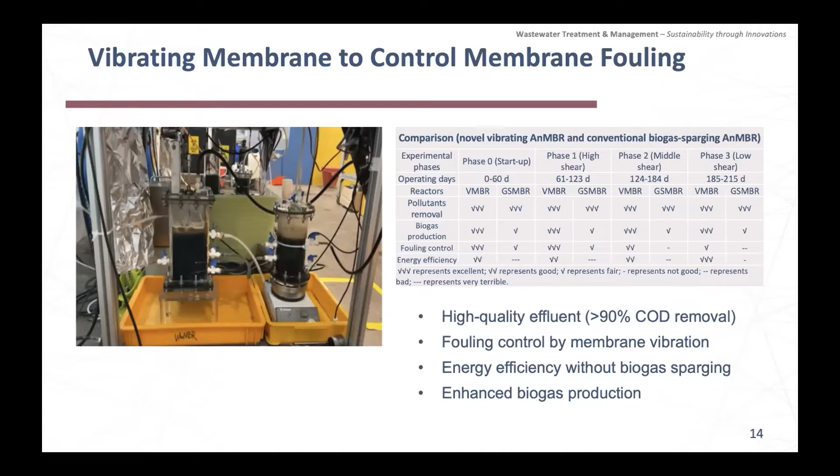So we explored vibration to create a shear force, and we found that the effluent quality is equally good. The vibration gives very good control of membrane fouling, and energy consumption is much lower. With less biogas sparging, the dissolved methane is actually lower, so it can enhance the natural emission of methane gas and capture, rather than having to go through other processes to extract it from the water.

And then the other issue people explore is membrane fouling through quorum quenching. So what is this QQ? Basically, bacteria communicate with each other. When the environment is stressed, they tell each other to stick together, and they produce EPS to make the sludge more sticky. That's how they result in biofilm growth. So bacteria communicate by quorum sensing. There's a certain group of bacteria that can actually consume and degrade this quorum sensing molecule, and that can minimize or slow down the rate of membrane fouling. So we've done extensive research using quorum quenching for anaerobic MBR.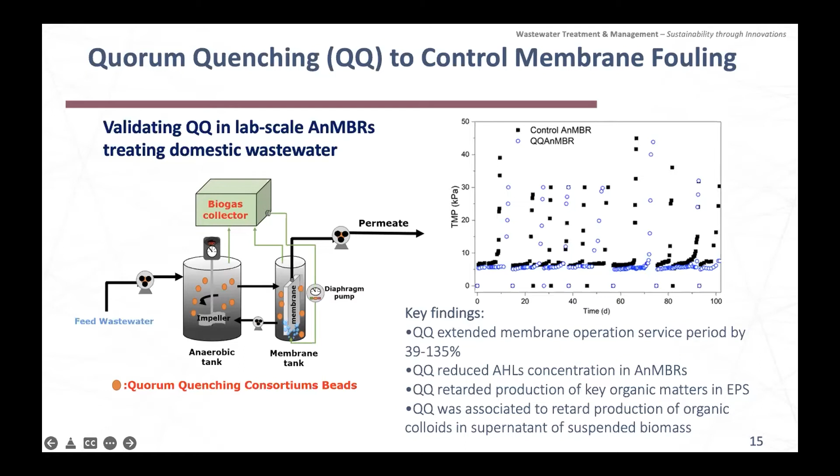So you can see this is a rise in TMP versus operation time. For this circle around one, you can see the TMP increase is much slower. So basically you can extend the operation period between 39 to 135% of the time. This effectively shows that quorum quenching is very promising, even for the anaerobic MBR process.

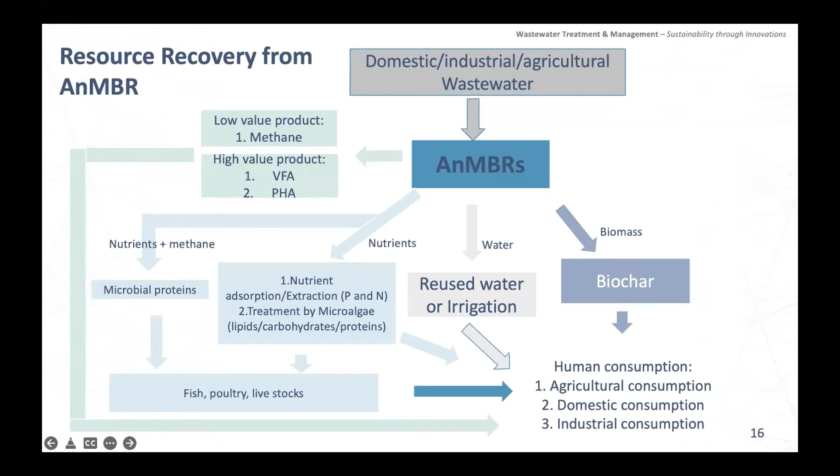So in summary, this anaerobic process basically looks at biomass. This is another approach people are looking at, even for biochar production, water recovery, and nutrient recovery. And then there's ongoing research to look at even VFA and PHA recovery from the anaerobic MBR. This anaerobic effluent, rich in nitrogen and phosphorus, can be used directly for agriculture irrigation or go for nutrient extraction.

Now, I think I need to jump off this one because we're running out of time. Basically, PHA is another approach people look at to recover from wastewater treatment, rather than just methane alone.

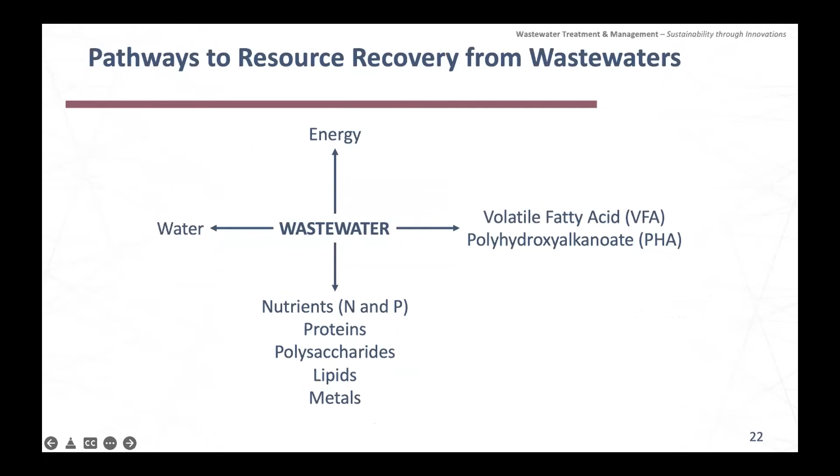So in summary, wastewater is a source of energy, water, potential VFA, PHA, and nutrients, N and P, proteins, polysaccharides, lipids, and of course metals. People talk about recovery. So eventually we know that, at the end of the day, we need to look at water management as an integrated approach, and indeed policy is very important. Wastewater is a resource, and we need to treat it as a recovery facility. Certainly you need innovative financing and sustainable business models, and very important, you need policy, institution, and regulatory frameworks.

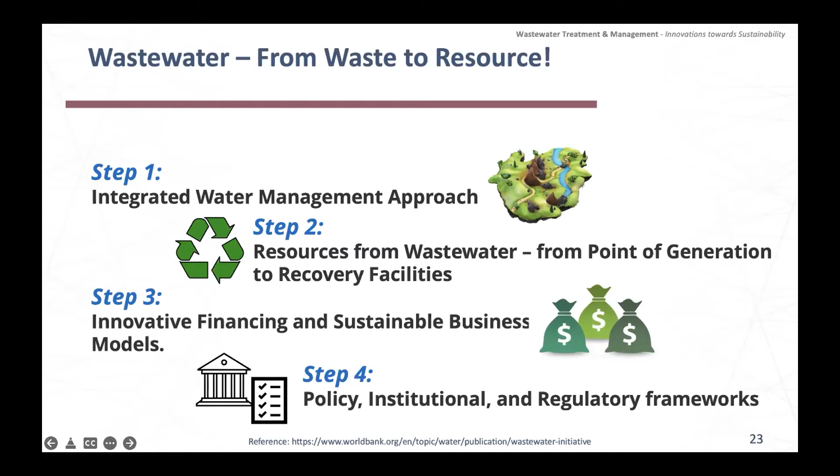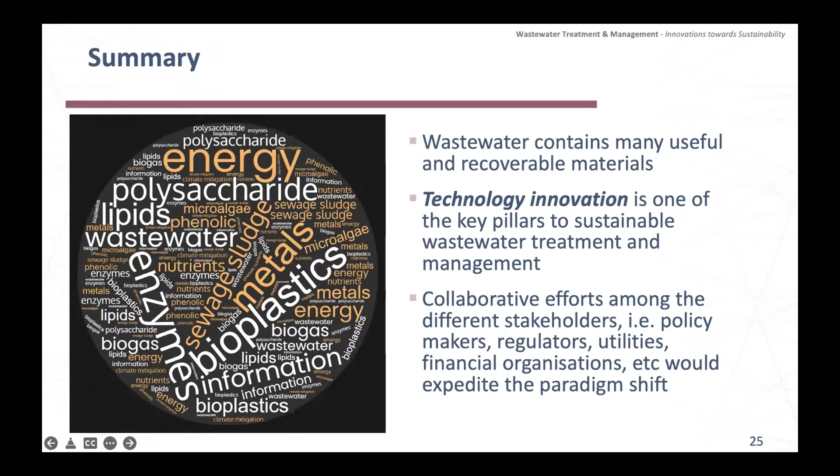In summary, wastewater contains many useful and recoverable materials, and technology innovation is always a key pillar to achieve a better and more efficient treatment process, to achieve better water, lower cost of recycled water, and also lower cost of resource recovery. We certainly need collaborative effort among different stakeholders, policymakers, regulators, utilities, financial organizations, etc., to expedite this paradigm shift. So with this, thank you very much for your attention.

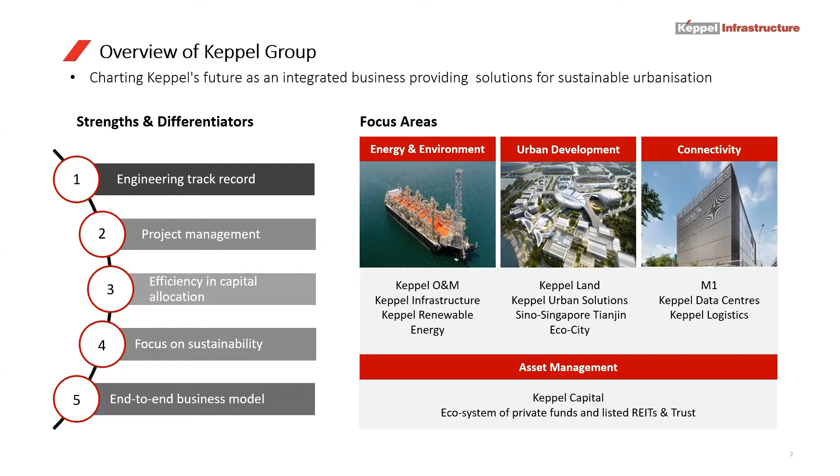For connectivity, we are one of the telcos, M1, and of course we have Keppel Data Center and Keppel Logistics. Underpinning all these groups of business, we have asset management, where our Keppel Capital manages about $36.1 billion of funds, providing us an ecosystem of private funds, and also some listed REITs and trusts.

Overview on Keppel Infrastructure: we strive to improve life and environment by providing solutions for sustainable infrastructure. We invest, develop, own and operate infrastructure in power and renewables, environmental, and new energy. For power and renewable, we are an experienced independent developer, owning and operating power plants, with a vertically integrated value chain for gas to power. We have gas retail, electricity retail, and Keppel Energy Nexus, where we own and operate pipe racks, network and utility on Jurong Island.

And of course power interconnection and electricity importation. For the environmental aspect, we are in waste treatment, water and wastewater treatment, and we have proprietary advanced combustion technology with regards to solid waste treatment, with a track record of over 100 projects in 20 countries.

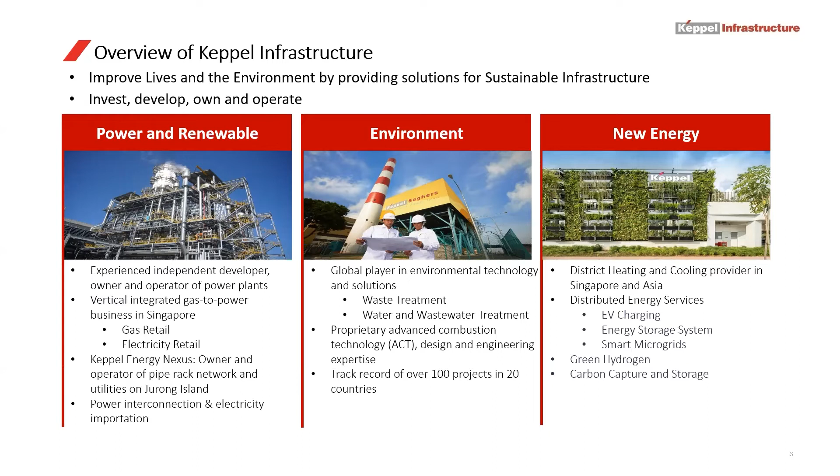New energy, we have district cooling - we are one of the major district cooling providers in Singapore as well as in Asia. We are now embarking on distributed energy services, including EV charging, energy storage, and smart microgrid. We are also looking into green hydrogen, carbon capture, and storage.

A little bit about Singapore's water strategy. Maybe I'll start from the rain first because it's easier to explain. In Singapore, from the rainfall we have stormwater management. All rainfall that falls into the city goes into the stormwater drains, and most of it is collected. We have collection of rainfall in 17 reservoirs, and after that it goes through treatment of raw water to potable water at PUB water treatment works, then it is supplied to either industry or households.

The used water is then collected by 3,500 kilometers of sewers and deep tunnel sewage systems towards 4 used water treatment plants, which we call water reclamation plants. The treated effluent will then either be discharged to the sea or go to 5 NEWater factories. From the NEWater factory, after processing, the water returns to industry, or some of the excess water goes back to the reservoir as indirect potable consumption. Our water strategy is also supplemented by seawater desalination plants - today there are 5 instead of 4 - that supply to the potable network.

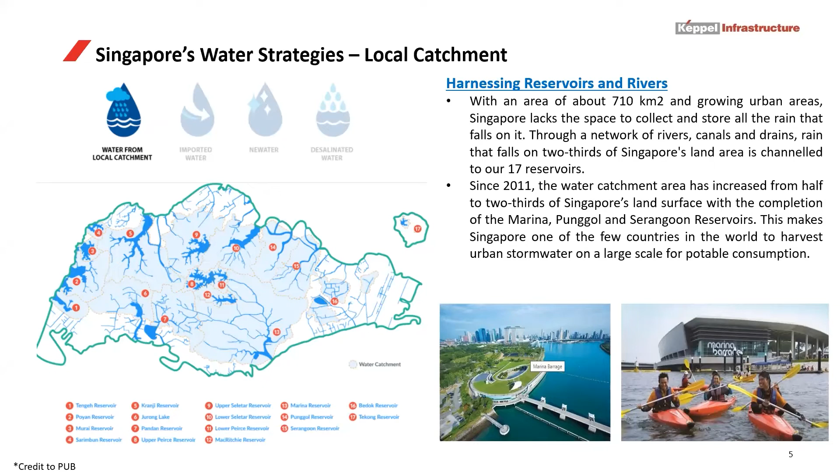The other source, imported water, is from Malaysia, from an agreement signed in 1962 and expected to expire by 2061. Given that this water agreement will expire in 2061, PUB and the government have taken a lot of initiative in ensuring we have other alternative water sources, including increasing local catchment, and of course new water and desalinated water.

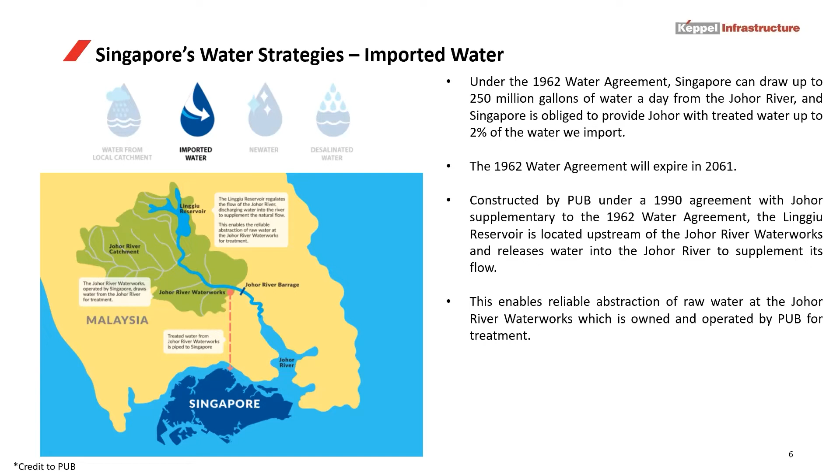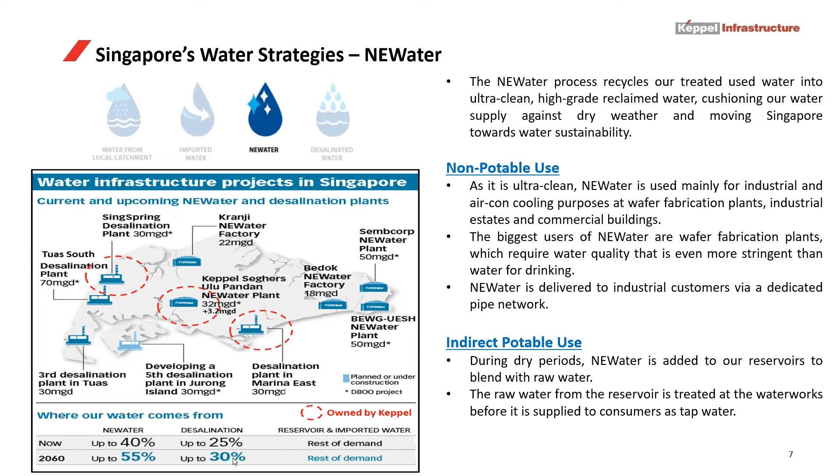Singapore's water strategy with regards to desalination plants: we know desalination water production is highly energy intensive, currently ranging between about 3.5 kilowatt hour per meter cube. The long-term target of PUB is to bring the specific energy consumption down to 1.5 kilowatt hour per meter cube, and on the longer run to 1 kilowatt hour per meter cube. It's a very stretched target, but the water industry people are working very hard towards this.

Keppel is also in collaboration with technology suppliers as well as Institutes of Higher Learning to look at this aspect of application, for some unique desalination plants like the one built by Keppel, which you can see on the slide. This Marina East desalination plant is the fourth desalination plant which Keppel owns, producing up to 137,000 meter cube per day of fresh drinking water to the network.

This plant is the first dual mode desalination plant. It's able to extract reservoir water from Marina Barrage or Marina Reservoir and treat it to potable water during wet season. During drought, the plant is able to extract water from the sea and treat it into potable water. Some unique feature of this desalination plant is that we are the first direct coupling desalination plant in Singapore, though in other parts of the world there may be some smaller plants that adopt this concept.

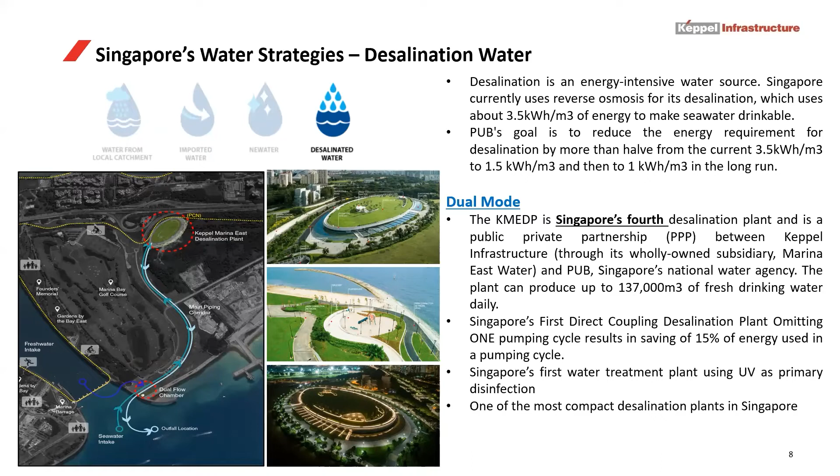Okay, a little bit on the approach of Singapore's strategy towards water infrastructure. Not all desalination plants or new water plants are generally PPP. What PPP means is that generally it refers to the government, the agency or organization functioning under the state budget, which is the public, and private, of course, generally refers to the profit and non-governmental voluntary sector or company. So the partnership is generally an agreement between two or more parties.

So the type of PPP model which you can see in the world, it could be BOT or BOO or BOOT, which I think is self-explanatory. So for this Marina Desalination Plant, it is a BOO in nature, but it incorporated the design aspect of things into it. So it is a design, build, own, and operate.

Now, there are some concerns and advantages with regards to the PPP model. Of course, by having a private entity in a PPP model, as they own the asset, they operate it with the operational expertise. The developer building the plant tends to put in a lot of value engineering to ensure that their approach is basically looking at the lowest life cycle cost. By doing so, with a competitive bidding exercise, the cost saving may be returned to the general public or the consumer.